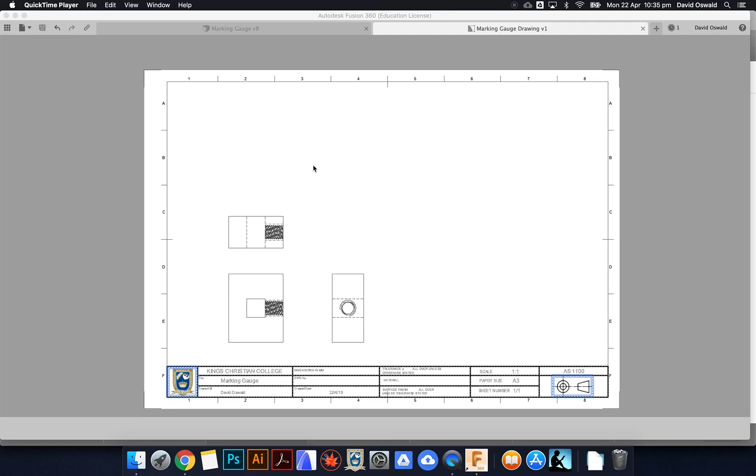You have the block in place on the drawing sheet. I want you to go back to the marking gauge. Obviously the next part to bring in is the stem, but this process you need to follow fairly carefully.

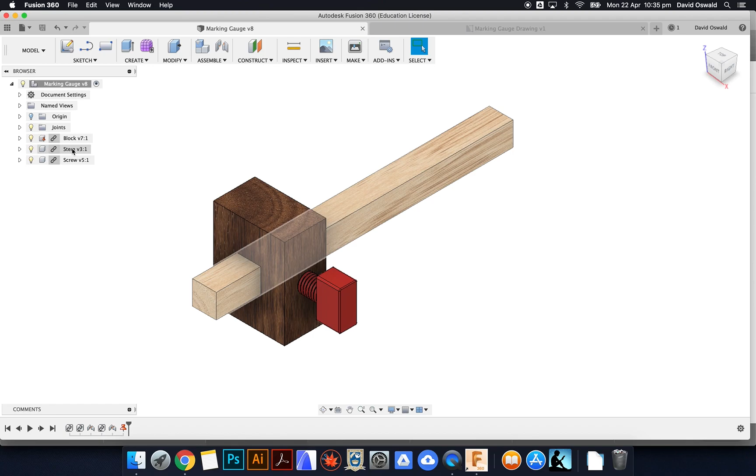To get this on the same page as the original, click opposite mouse click, create drawing. Now it can't be a new drawing—it'll be a totally separate drawing if you do that. You won't be able to add this to the previous drawing because we're looking for this layout, this section on top of this drawing environment. So let's go to here.

I go to create. I don't want to create new—that's what we called the marking gauge thing. That's the sheet I want it on. If you click on that again, you'll see the pull down menu below it is sheet 1. That's sheet 1 of that particular drawing, where we want that. Click OK.

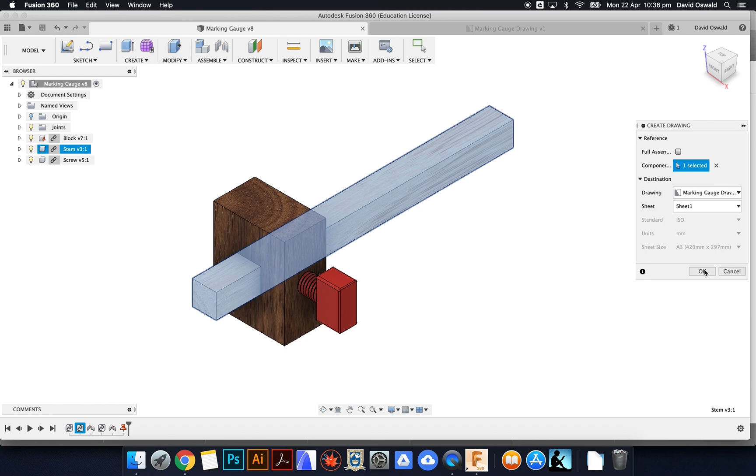Now you'll notice that I've got this. Let's think about this dialogue on the side here. This particular block, I brought it in on a scale of 1:1—in other words, on the sheet of paper, which is an A3 sheet, it's the same size as the real object. So let's just go 1:1.

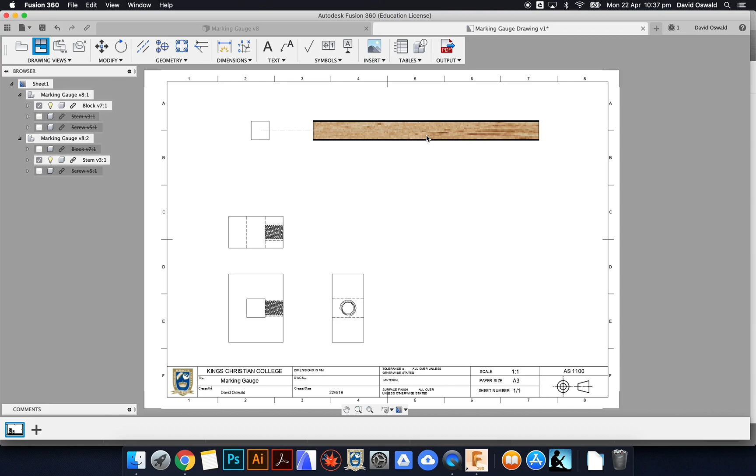So I'm going to position it, don't mind where I position it to start with. Click OK. Click on that, opposite mouse click, project view, project out the side, and click OK. Now the only thing I'm looking at is the gap between here, the gap here, the gap here—I'm just trying to even it out a bit, so I'm going to move that along a bit so it's evenly spaced.

Let's do the same process. Let's go back. If you have a look at this drawing, I want to bring in the actual screw, and I need it in an end view, a side view, a top view—similar positions as those. So let's go back to the drawing environment, back to the original assembly.

Opposite mouse click, create drawing. I'm going to go to the marking gauge, and I'm going to go to sheet 1. I want all of these drawings in the same environment.

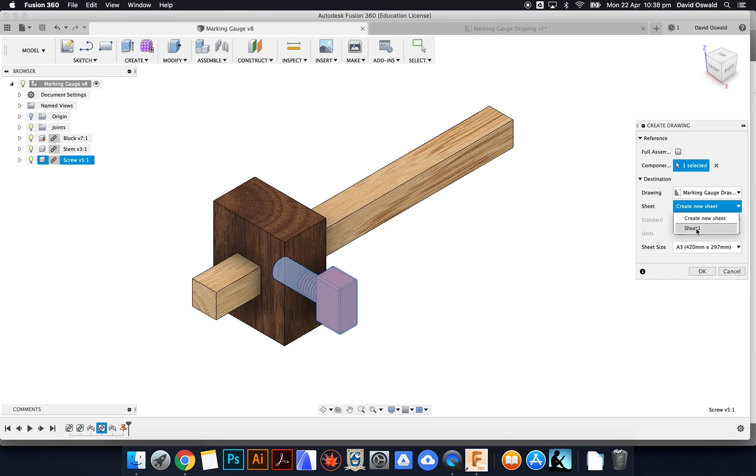Now if you have a look at that, I've got 2:1 on this—that's way too big, not in proportion to that. So let's pull the menu down and go 1:1. You'll see the proportion—it's the size that would screw into this hole here. And I'm just going to position it and go OK.

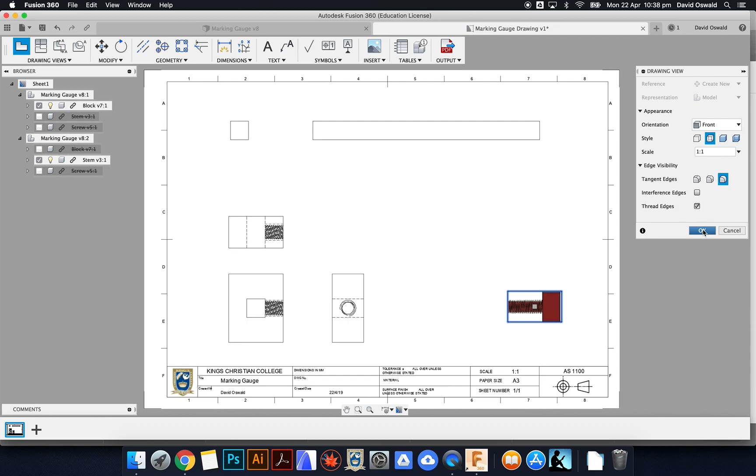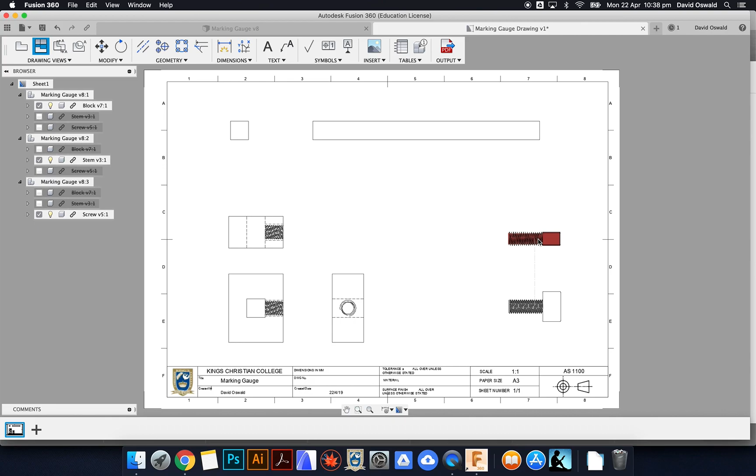That's the way we position it now, and I'm looking at the top view and the side view. So let's quickly get those views in. Click, opposite mouse click, project view. Now I can do both of those very quickly. Okay, so there and there. And because that's smaller, I'm going to click OK to that.

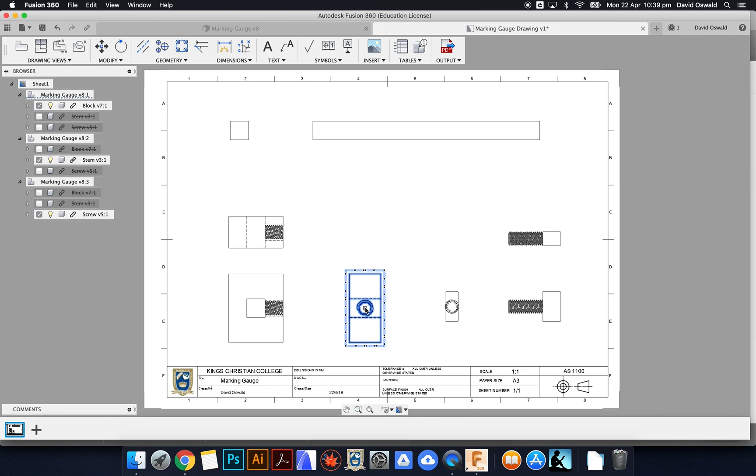If you look at the space this has got, and this is the most complex piece down here, it's sort of taking up a lot of room. So I might just move that across a bit. I might move this one probably up a little bit, and I might move this one up a little bit.

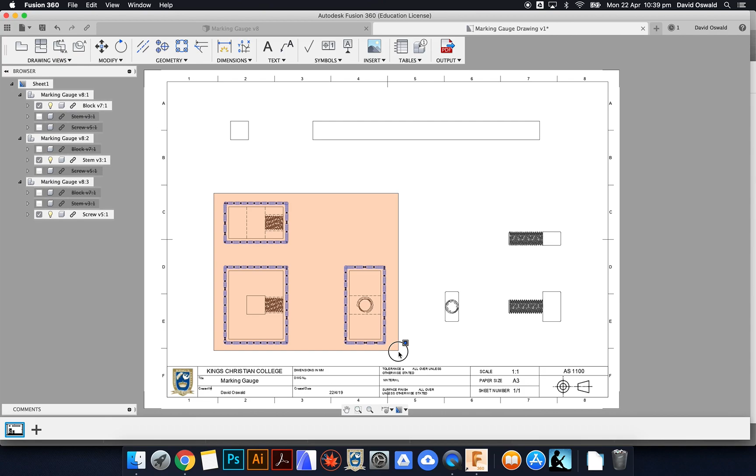I'm just looking at spacing out the objects nice and neatly. Probably a lot of gap between here. I could probably, if I can grab all those—I'm not sure if I can grab all. Yeah, let's just move that one. Let's move this one up. I can probably grab that one and that one.

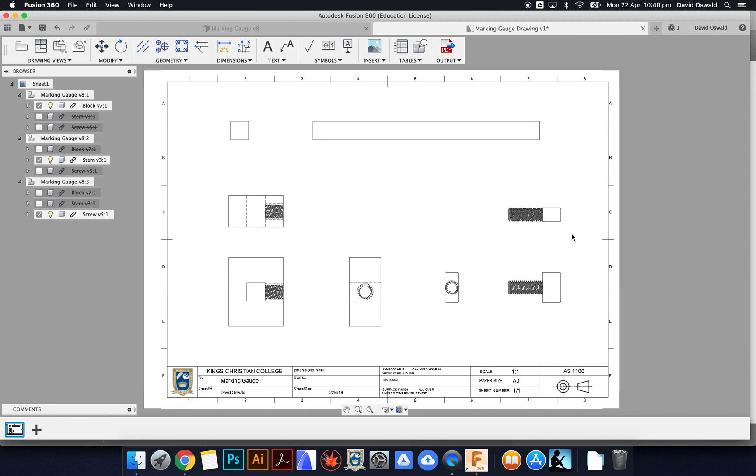Although as soon as I move this view, it moves the other one anyway. I'm just tidying up, making it look a little bit neater. Okay, so I've got all of my views assembled on that page, very similar to this one.